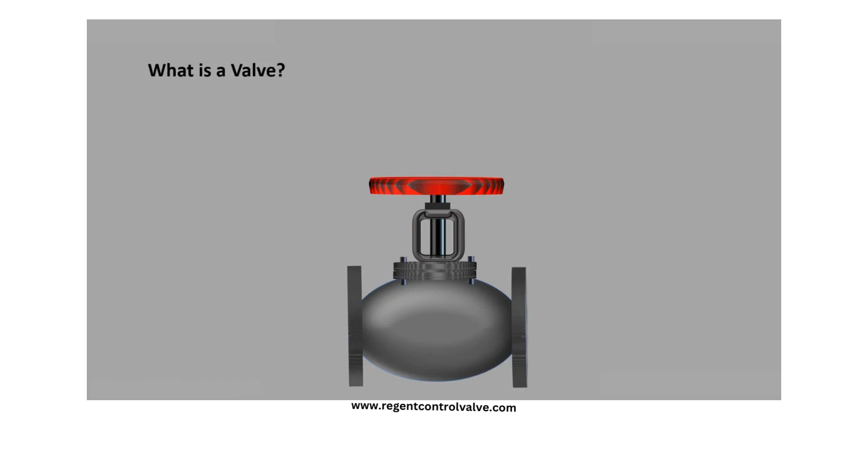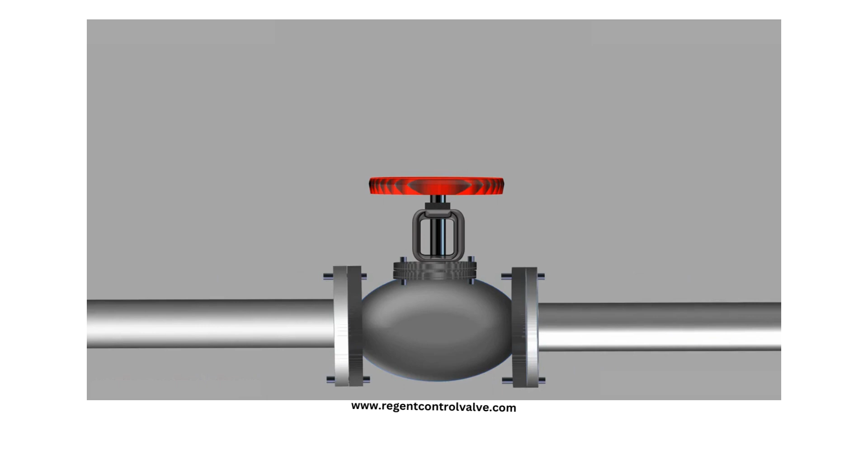First, let's discuss what is a valve. A valve is a mechanical device which is usually installed in a pipeline. A valve has a movable part using which it controls the flow of liquid, gas or any loose materials flowing through the pipeline. Normal valves are operated using hand wheels or levers. To open or close these valves, an operator should go near to it and turn the hand wheels.

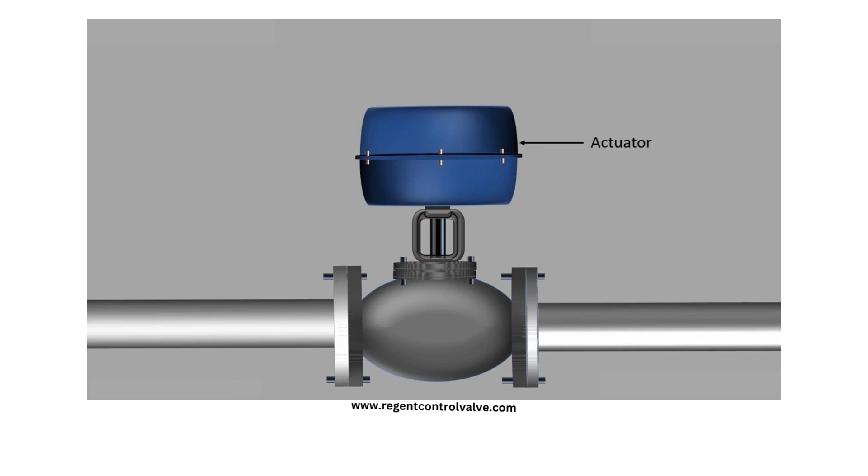In a process plant, we know that instruments should work as per the signals from the control room. For this, instead of hand wheels or levers, actuators are used to operate the valve. Actuators reduce the need of an operator to go near to the valve for opening and closing. When actuators are used, valves can be operated from the control room. This type of valve, which uses actuators to automatically control the flow, is called a control valve. Any valve can be converted to a control valve simply by adding an actuator. The actuator is the major part of the control valve which operates the valve. The actuator would operate according to the signal received from the control room.

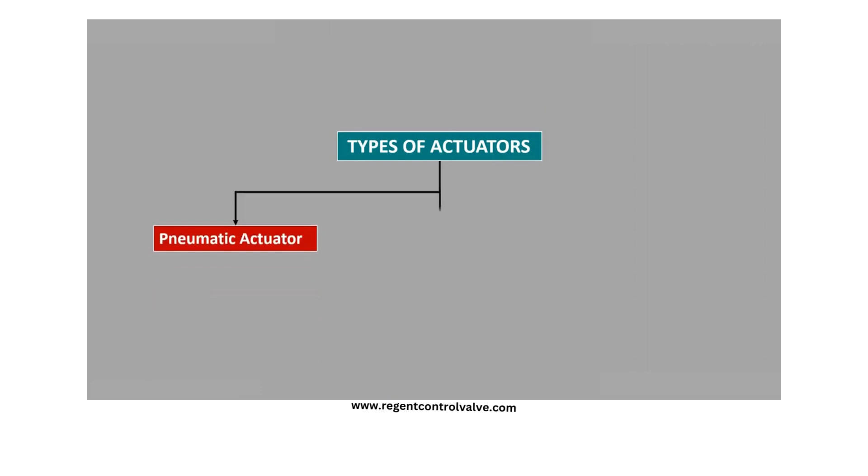There are mainly three types of actuators: pneumatic actuator, electric actuator, and hydraulic actuator. Pneumatic actuators use an air or gas signal from an external source to turn the valve. They are the most commonly used actuator for valves in the process and oil industries. In this type, compressed air is applied either on a diaphragm or on a piston, which in turn moves the valve stem. Electric valve actuators use an electric motor to provide torque required to operate the valve. These types of actuators are commonly used in remote locations where it will not be practical to pipe hydraulics or compressed air.

Hydraulic valve actuators depend on non-compressible fluids like hydraulic oil to provide the required force to operate the valve. Hydraulic actuators can provide greater force, due to which they are used for big valves.

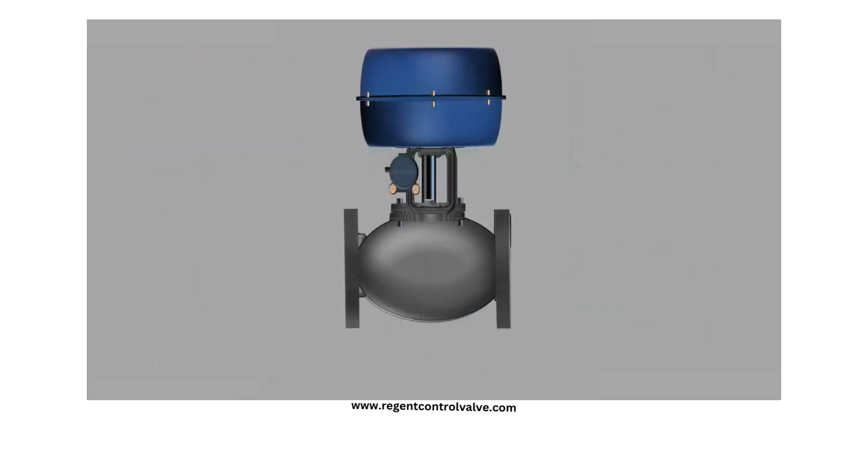Parts of control valve. Valve body. One of the main parts of the control valve is its body, as it is the framework that holds everything together. The ends of the valve body are designed to connect the valve to the piping by different types of end connections. The valve body may be casted in different shapes using different materials, depending upon the purpose for which the valves are used.

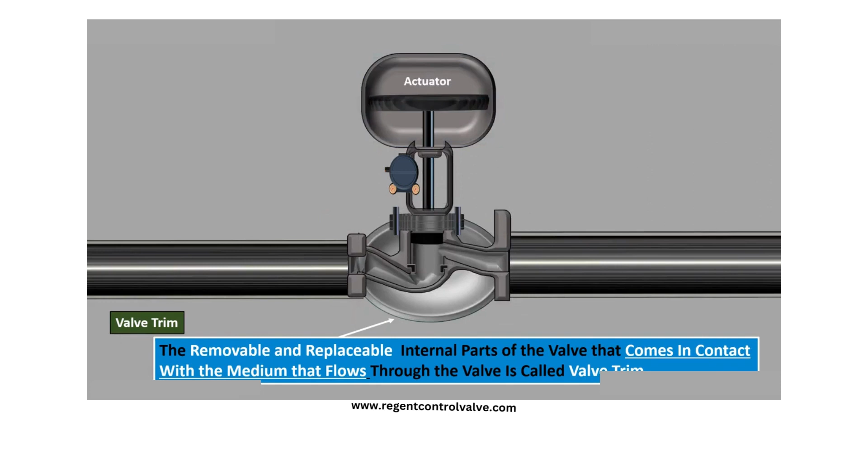Valve trim. The heart of the control valve is the trim. The removable and replaceable internal parts of the valve that come in contact with the medium that flows through the valve are collectively termed as valve trim. Valve trim includes valve seat, valve disc, internal springs, etc. The valve disc is the part which allows the valve to throttle or stop flow depending on its position. The valve disc and the valve seats create a seal to stop the flow. Some control valves have one seat, while some others have multiple seats.

Valve stem. The stem is connected to the actuator from one side, and the other side is connected to the disc. The stem of the control valve provides movement to the disc, which results in opening or closing of the valve.

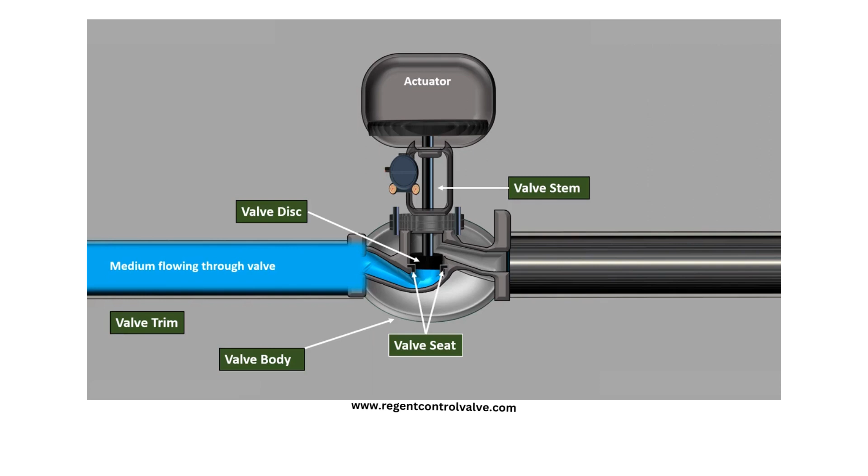Yoke. The yoke connects the valve body or bonnet with the actuating mechanism.

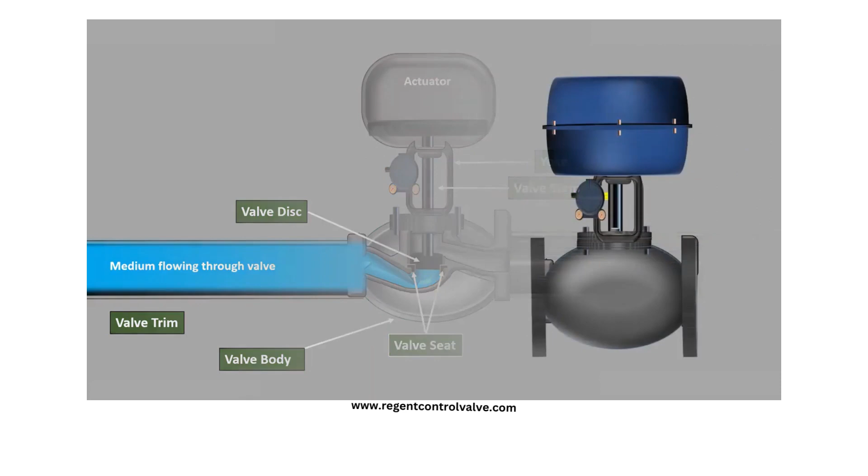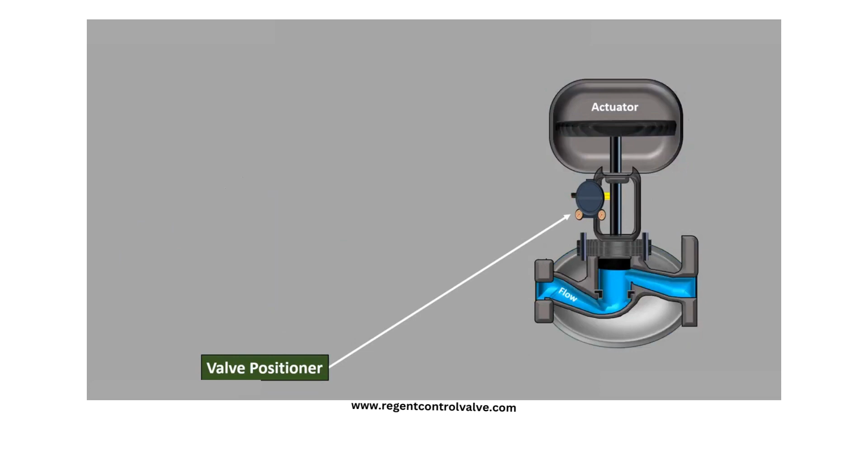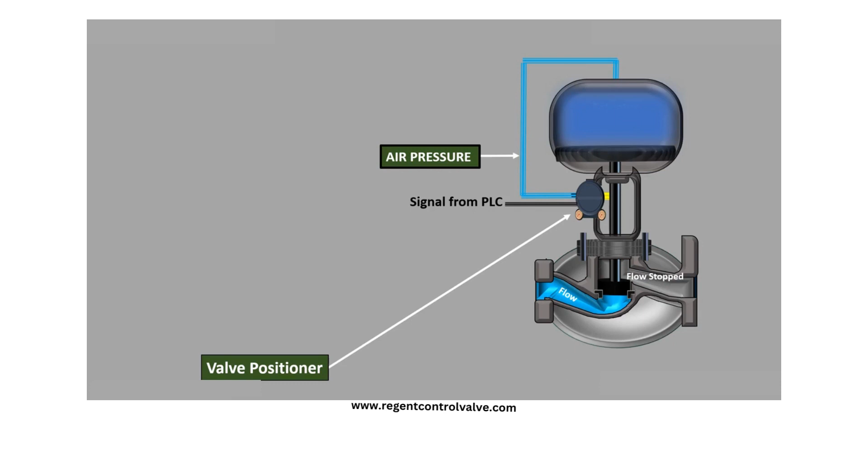Valve positioner. As the name indicates, control valve positioners are devices that help in positioning the actuator of the control valve by increasing or decreasing the air pressure on the actuator. They are generally mounted on the side or top casing of the actuator. If there is no positioner, the pneumatic control signal goes directly to the actuator. As there can be other forces acting on the valve stem, accurate positioning cannot be achieved. So, when accurate and faster control is required, a valve positioner is used.

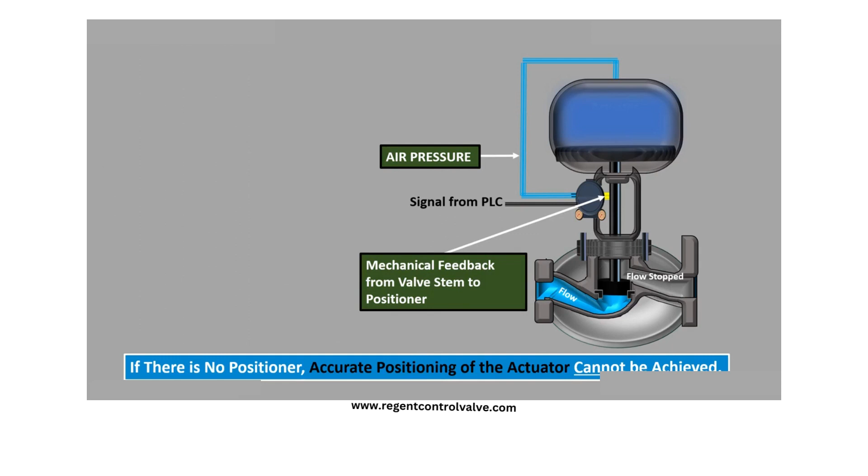A valve positioner will have a mechanical feedback from the valve stem, which will inform the valve positioner about the exact position of the valve stem. The valve positioner compares the valve stem position with the demand generated by the controller like PLC. If the valve stem is incorrectly positioned, the positioner increases or decreases the air in the actuator until the correct valve stem position is achieved.

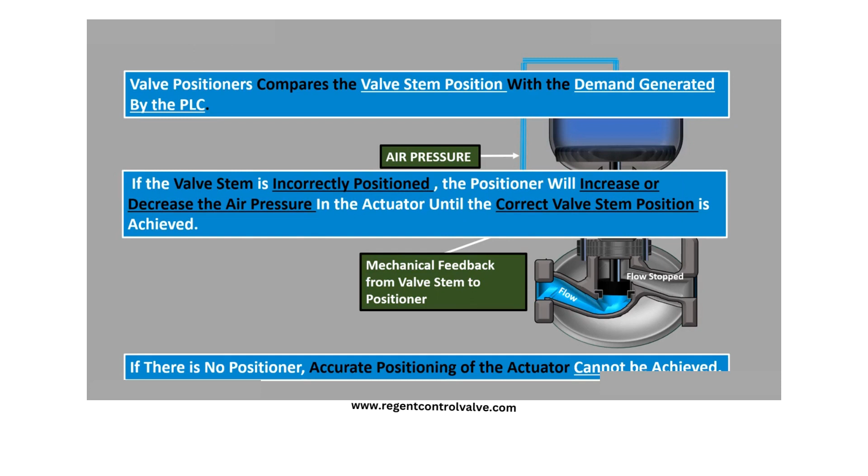There are mainly three types of valve positioners: pneumatic positioner, electro-pneumatic positioner, and digital positioner. Pneumatic positioner receives a pneumatic signal, that means air signal, typically of 3 to 15 psi, from a controller like PLC. It then sends a corresponding output pneumatic signal to a pneumatic valve actuator.

Electro-pneumatic positioner receives an electric signal, typically 4 to 20 milliamperes or 0 to 10 VDC, from a controller, and it then sends a corresponding output pneumatic signal to a pneumatic valve actuator. Electro-pneumatic positioner uses an I/P converter.

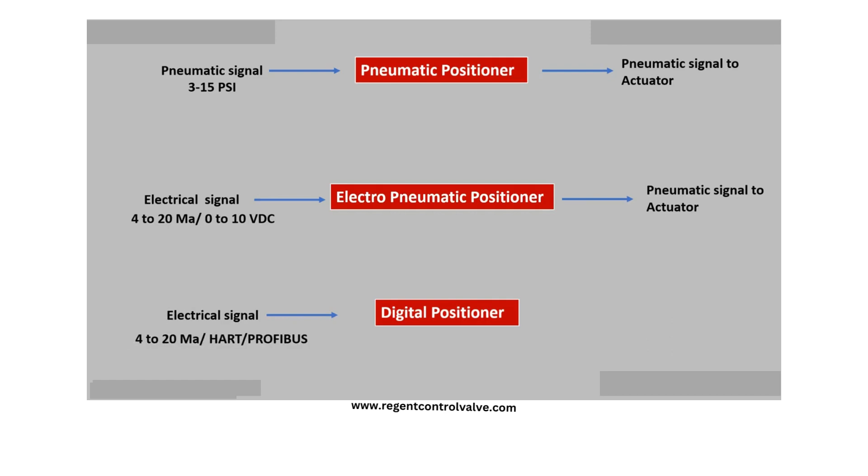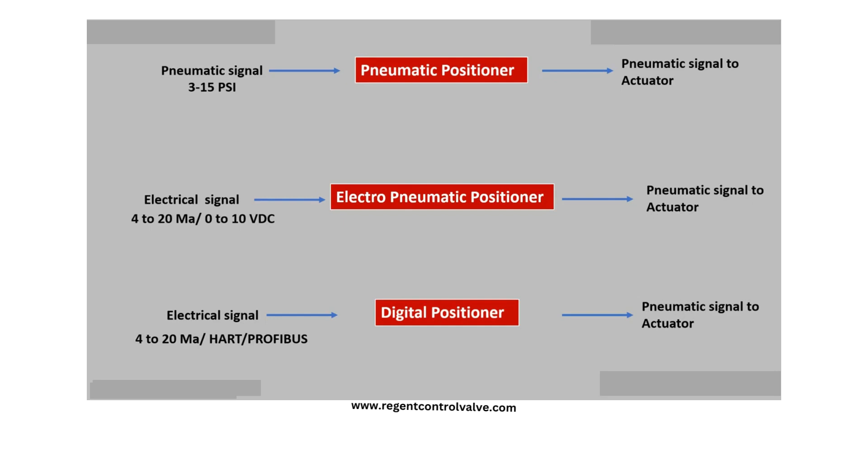A digital valve positioner receives an electric signal, typically 4 to 20 milliamperes, HART, PROFIBUS, etc., from a controller. It then sends a corresponding output pneumatic signal to a pneumatic valve actuator. Digital positioners are also called smart positioners. They use sensors and microprocessors to position the valve actuator and to monitor and record data. Thus, they are very accurate.